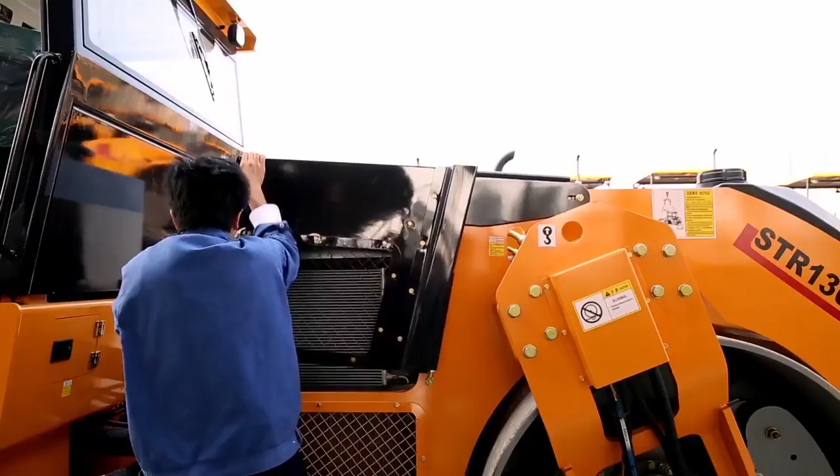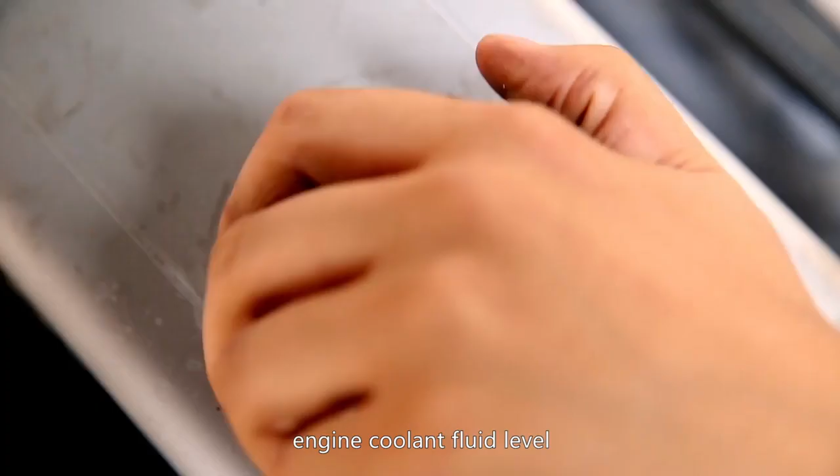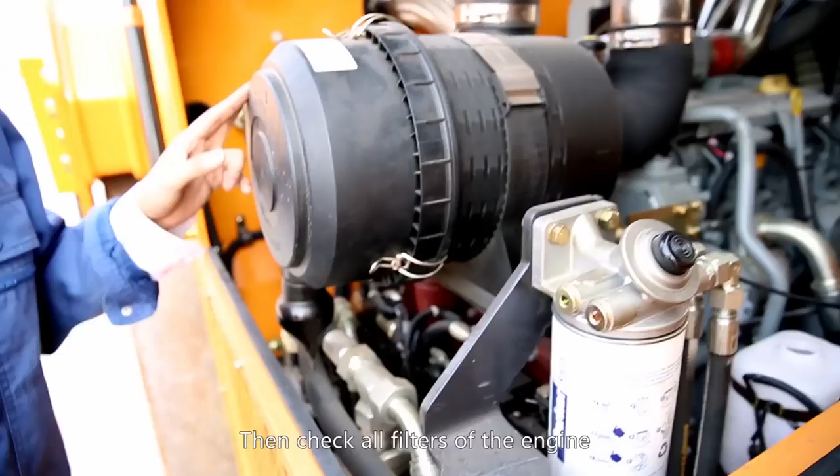Getting started. Before starting the machine, conduct a check of the machine. First, check the engine oil level, engine coolant fluid level, hydraulic oil level. Then check the diesel level. Then check all filters of the engine: air filter, oil filter, and diesel fuel filter.

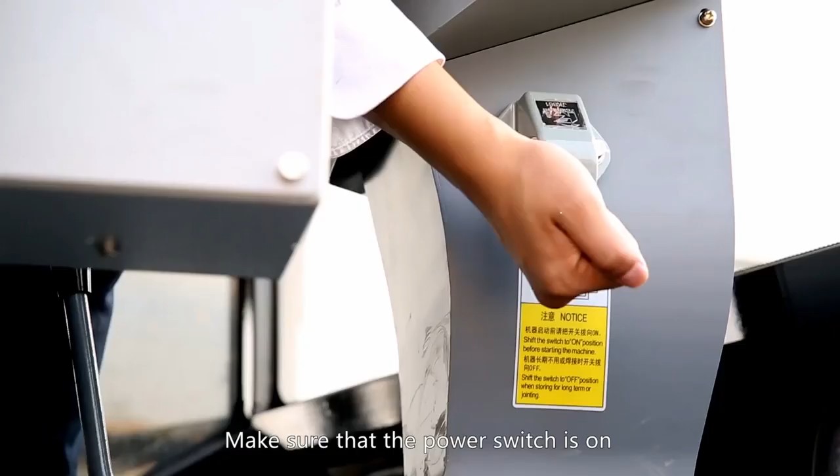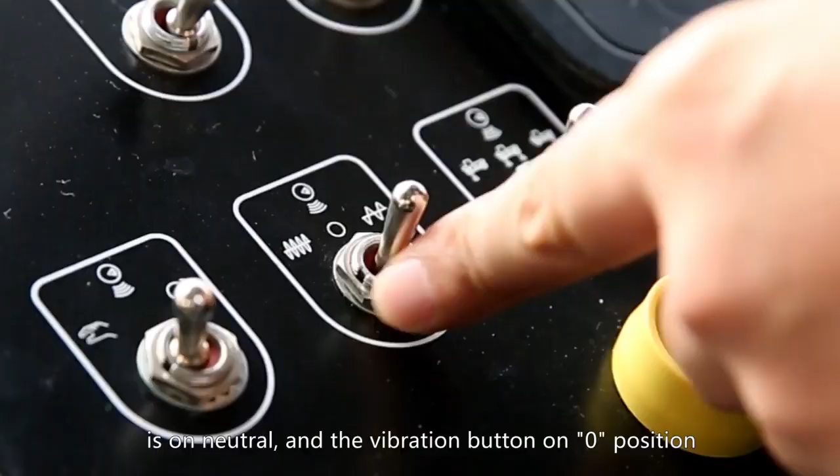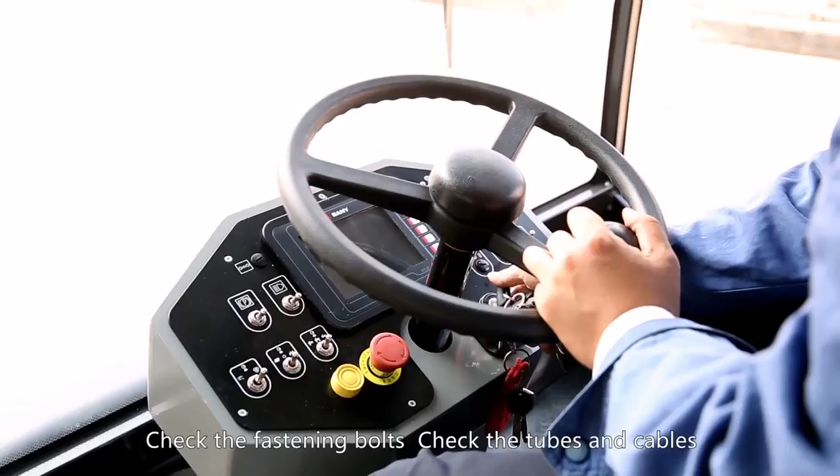Make sure that the power switch is on, the accelerator lever is on neutral, and the vibration button is on 0 position. Insert the key to the ignition lock and turn it to the 1 position. Sound the horn 3 times to warn those near the machine. Check the fastening bolt, check the tubes and cables. Make sure that everything is normal, and then start the engine.

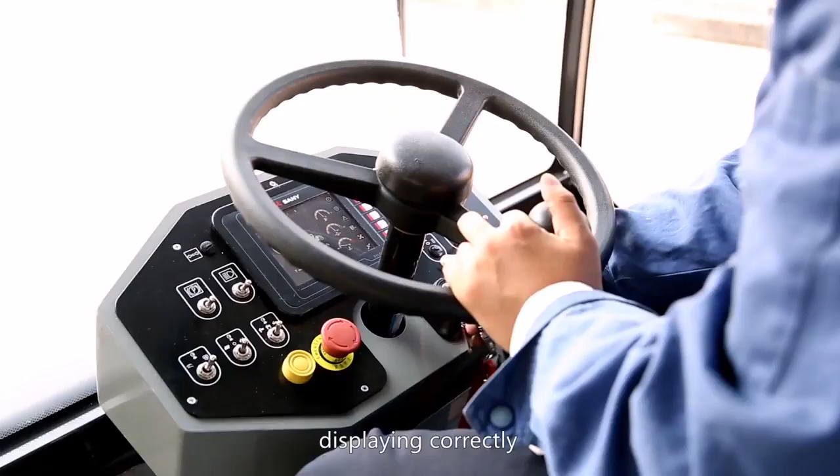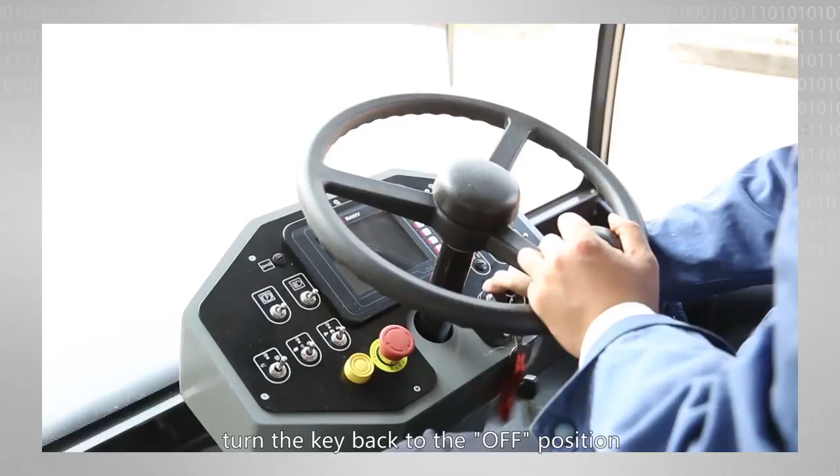Check to see whether or not all indicators and instruments are displaying correctly. Turn the ignition key to the START position and release it immediately when the engine has been started. Attention! 1. To avoid damaging the starter, each turning of the starter motor must not last longer than 10 seconds. When the engine cannot be started, turn the key back to the off position and wait for 30 seconds before trying again. 2. Avoid high-speed rotation when the motor temperature is low.

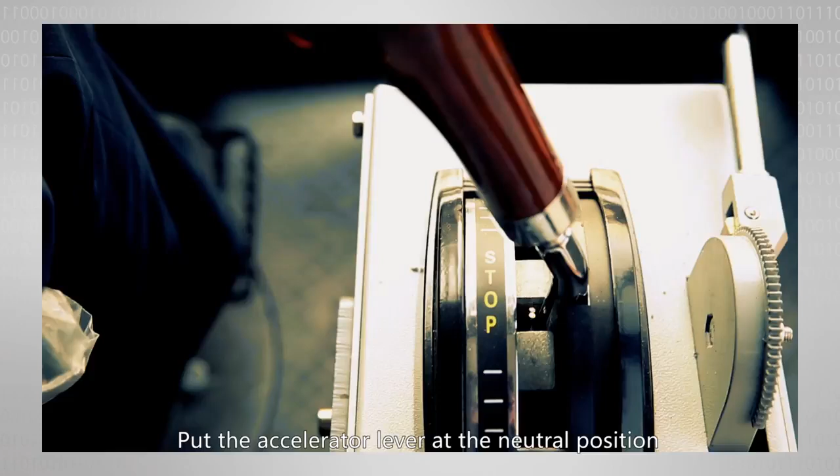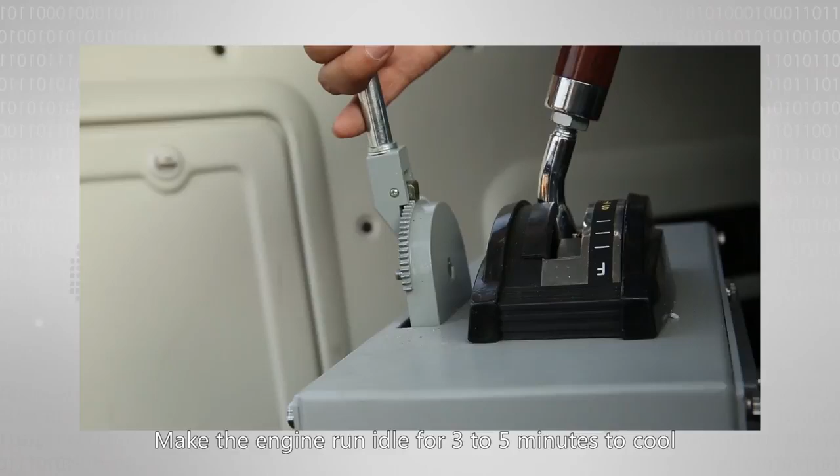3. Put the accelerator lever at the neutral position before starting the engine. Otherwise, the engine will not be started. 4. Make the engine run idle for 3 to 5 minutes to cool off before turning it off.

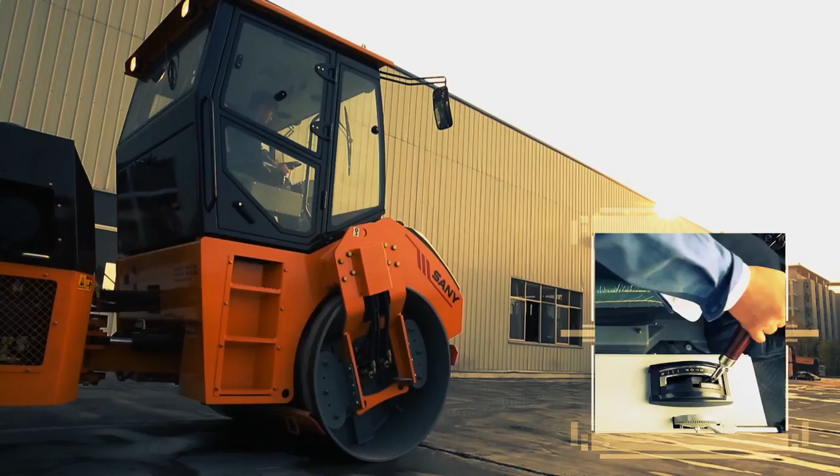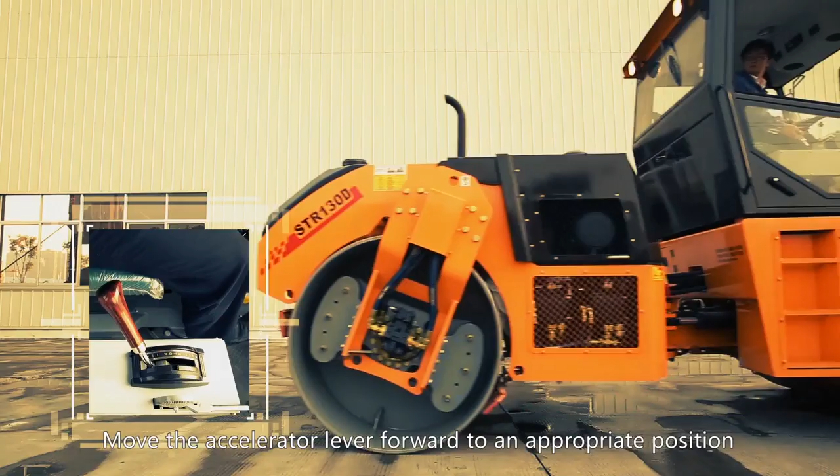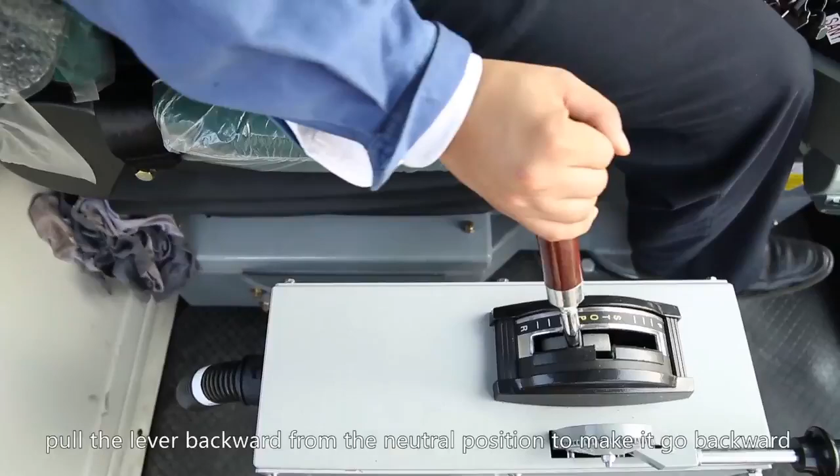Running operation. Pull the throttle lever slowly to raise the engine speed to a rated speed. Select the gear of the appropriate traveling speed. Move the accelerator lever forward to an appropriate position. Push the lever forward from the neutral position to make the machine move forward. Pull the lever backward from the neutral position to make it go backward. To stop, place the lever in the neutral position.

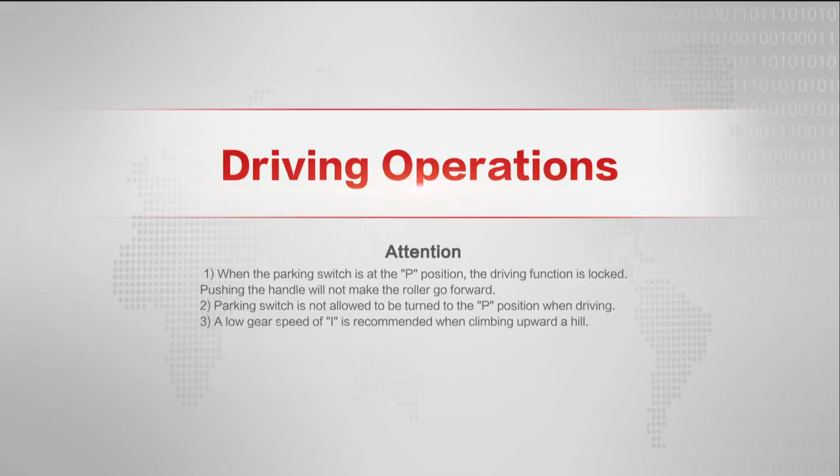Attention! 1. When the parking switch is at the P position, the driving function is locked. Pushing the handle will not make the roller go forward. 2. Parking switch is not allowed to be turned to the P position when driving. 3. A lower gear speed of 1 is recommended when climbing up a hill.

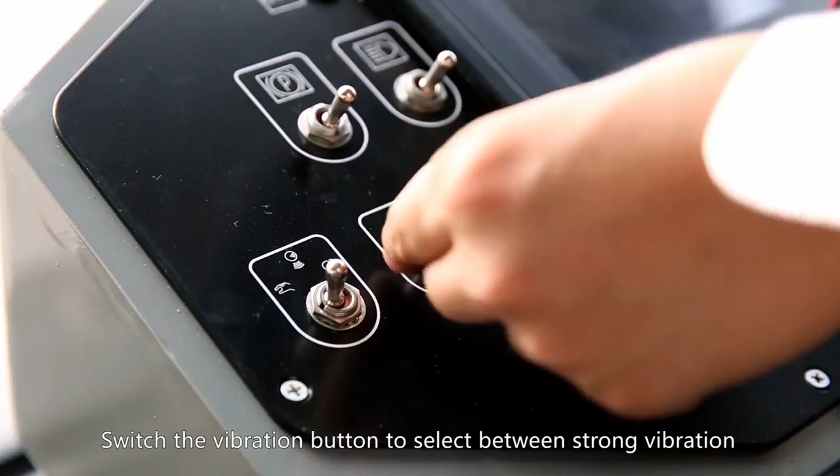Vibration operation. Switch the vibration button to select between strong vibration and weak vibration and make the machine travel at Gear 1 or Gear 2. When the manual vibration mode is selected, press the button on the accelerator lever to start vibration. When vibration needs to stop, press the button on the accelerator lever again.

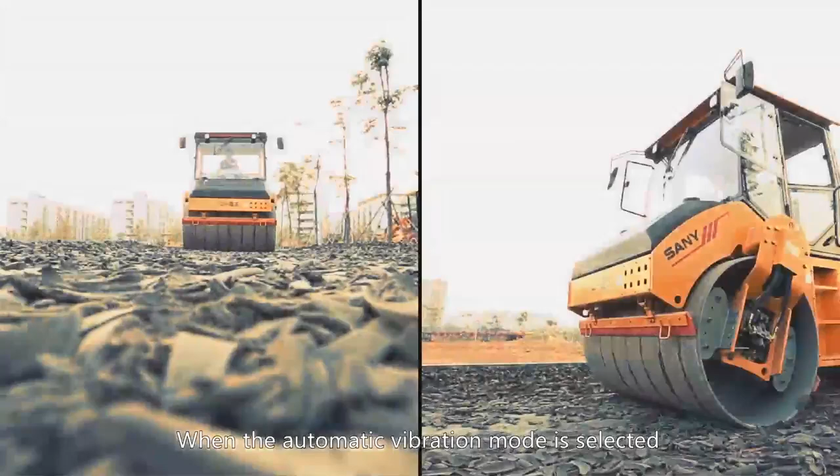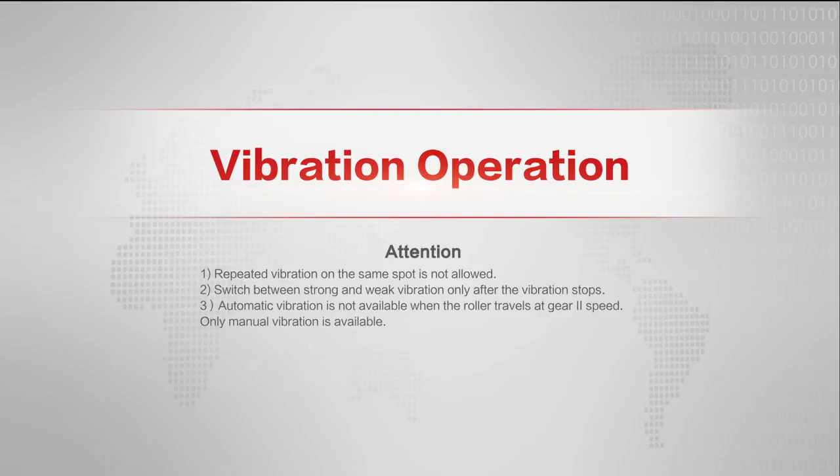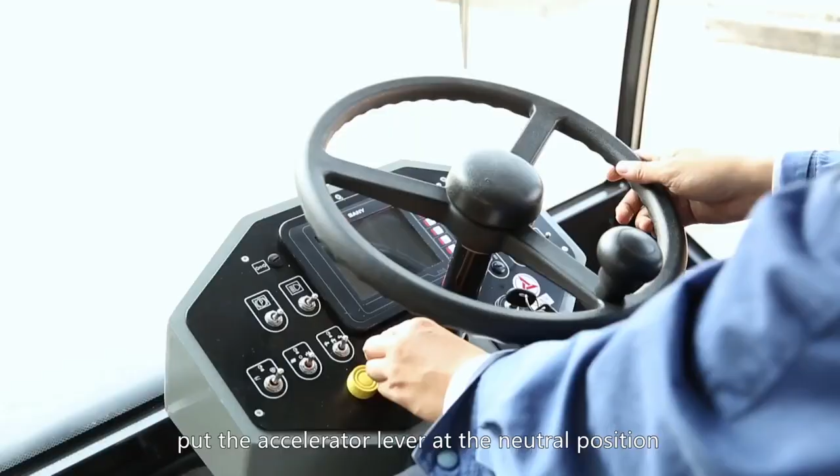Stopping, parking, and emergency stopping. Stop driving. Place lever in the neutral position to stop the roller. Parking. To stop and park the vehicle, put the accelerator lever at the neutral position. Turn the parking switch to the P position or stall the engine.

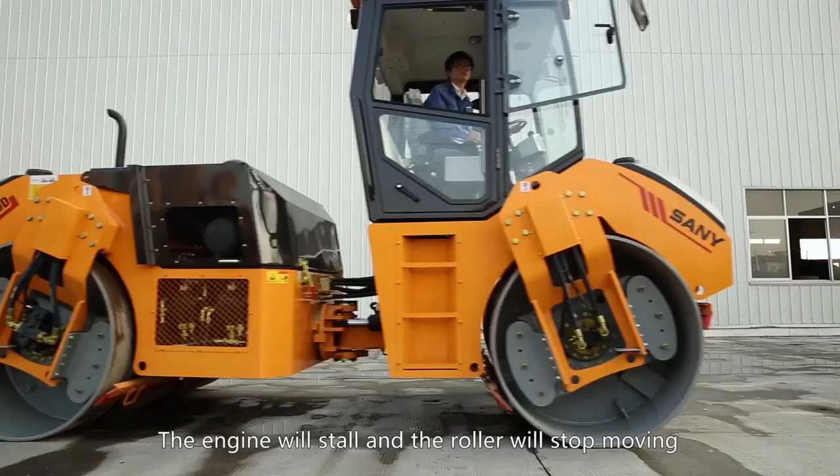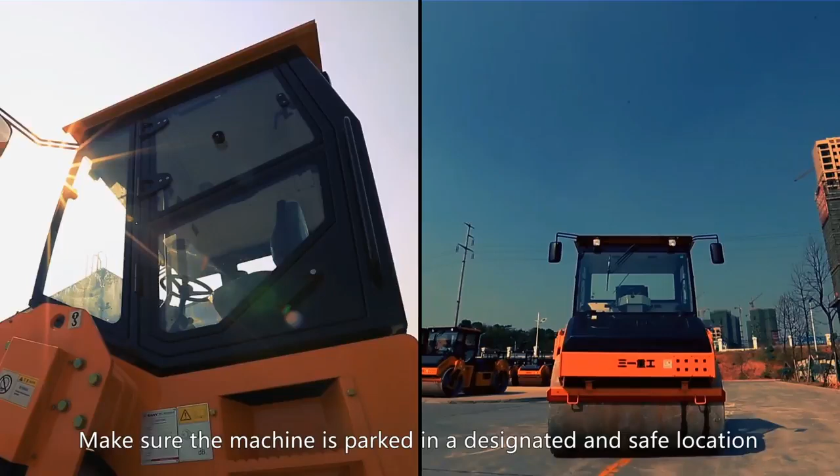Correct shutdown. Make sure the machine is parked in a designated and safe location. Before turning off the engine, let it run idle for 3 to 5 minutes, for it to cool down gradually. Then turn off the power switch and lock the cab door.

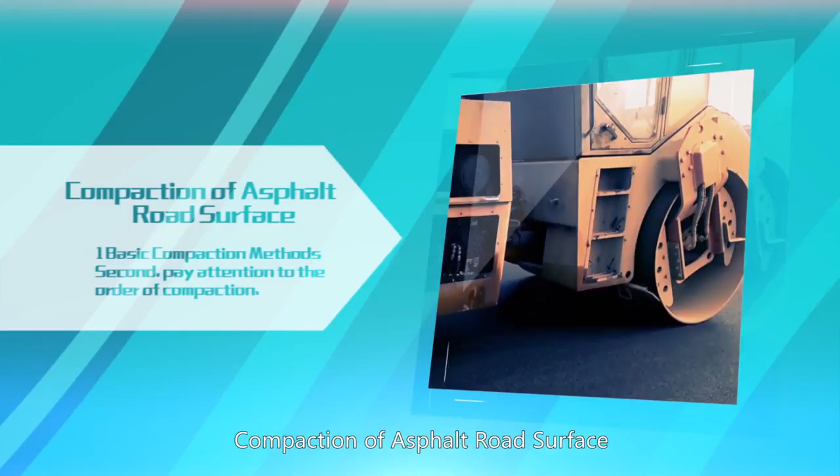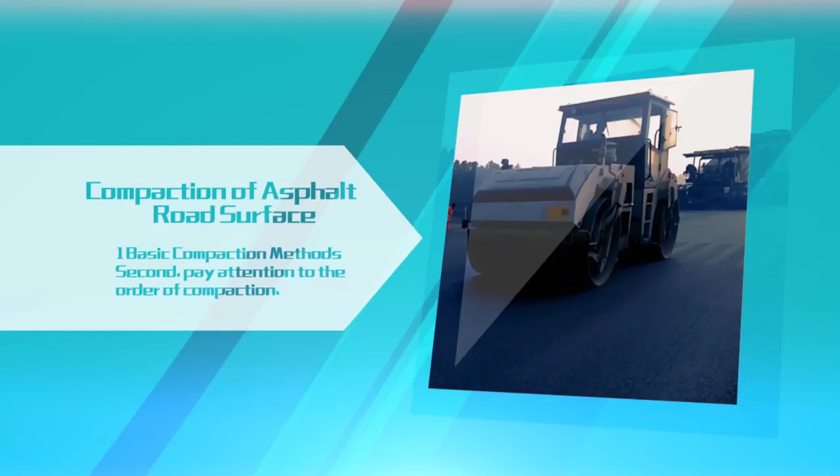Compaction of asphalt road surface. 1. Basic compaction method. First, following the asphalt paver closely and compacting slowly. When the paver is paving asphalt, the roller should follow it closely and do the compaction timely.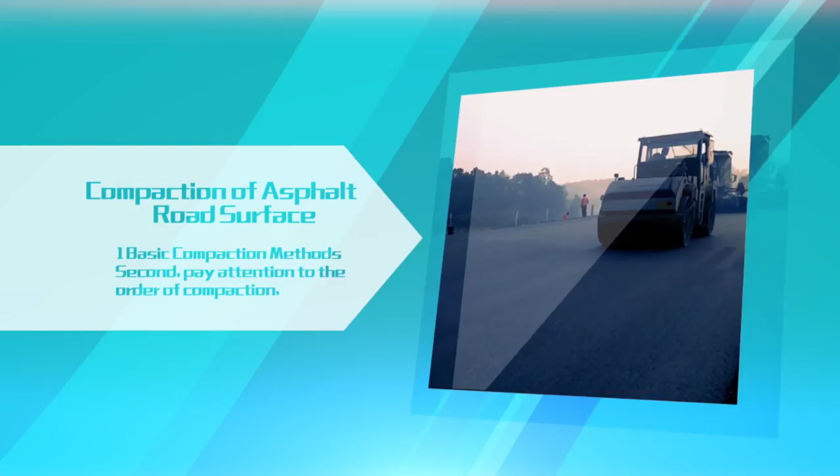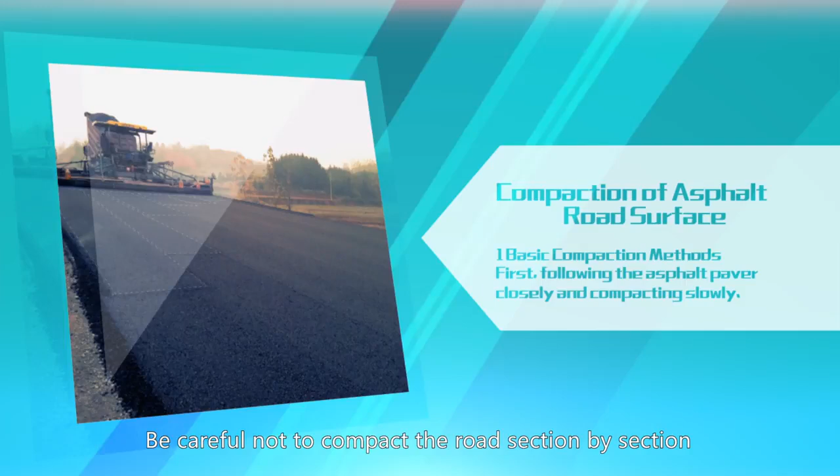When the entire road is compacted, the roller should continue to follow the paver in the second round of paving in order to make the second layer of paving compacted timely. Be careful not to compact the road section by section. It will cause height differences this way. Pay attention to the order of compaction.

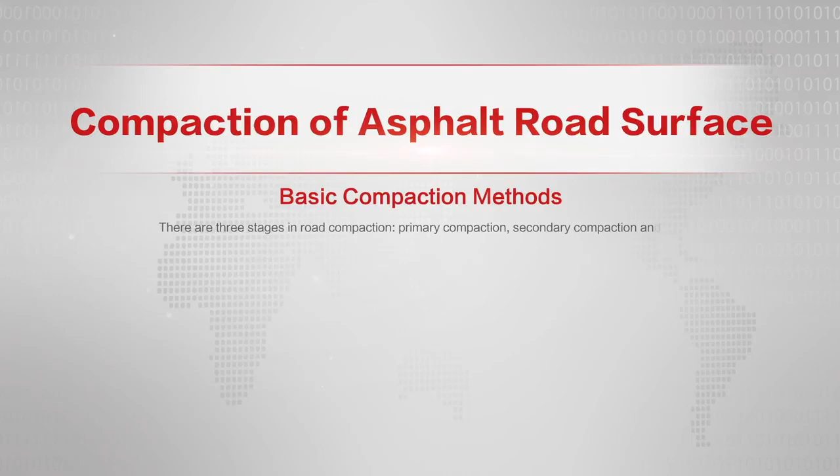There are 3 stages in road compaction: primary compaction, secondary compaction, and final compaction. The times of compaction differ from stage to stage. See the following table. Tandem rollers are used for the initial compaction and final compaction. Pneumatic tire rollers are used for secondary compaction.

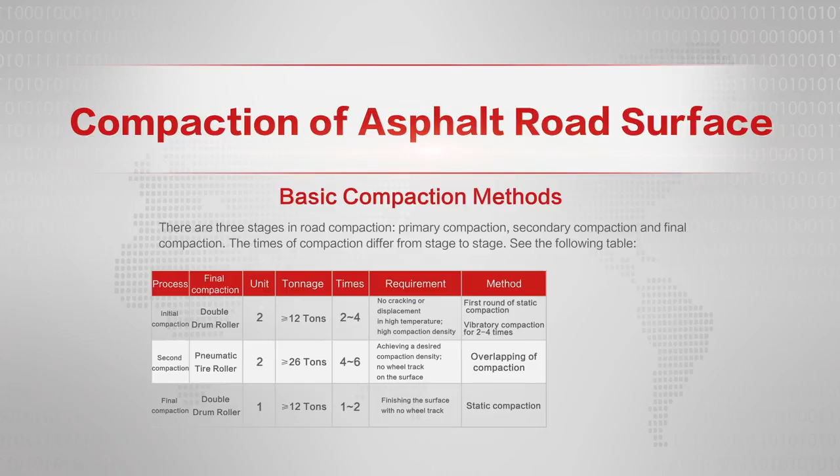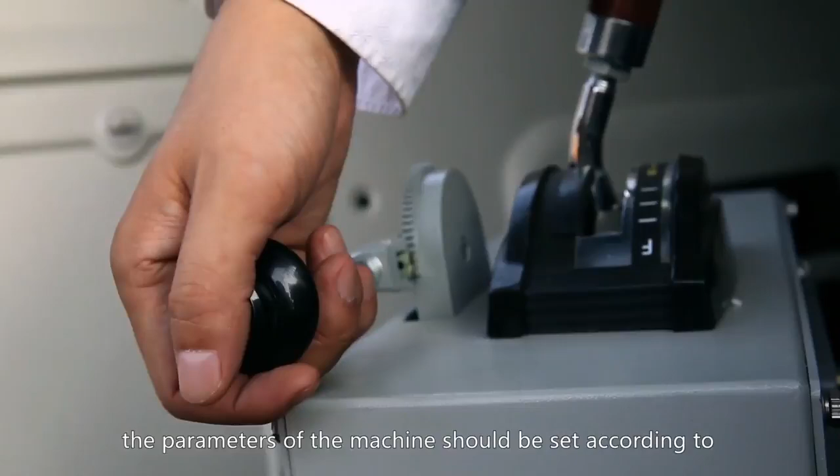The purpose of the final compaction is to improve the evenness of the surface and remove the impression of the pneumatic tire roller. 2. Principles for setting the basic parameters during compaction. During compaction, the parameters of the machine should be set according to the changes in the compacted objects.

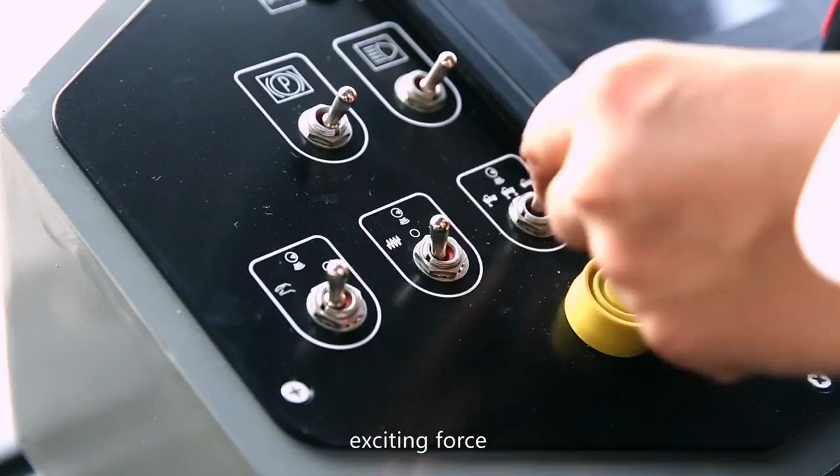Parameters of the machine to be set: frequency of vibration, exciting force, vibration or static compaction, traveling speed, and the amount of water sprinkled. Factors influencing the parameter setting: thickness of compaction and temperature, grading, and types of the materials for compaction.

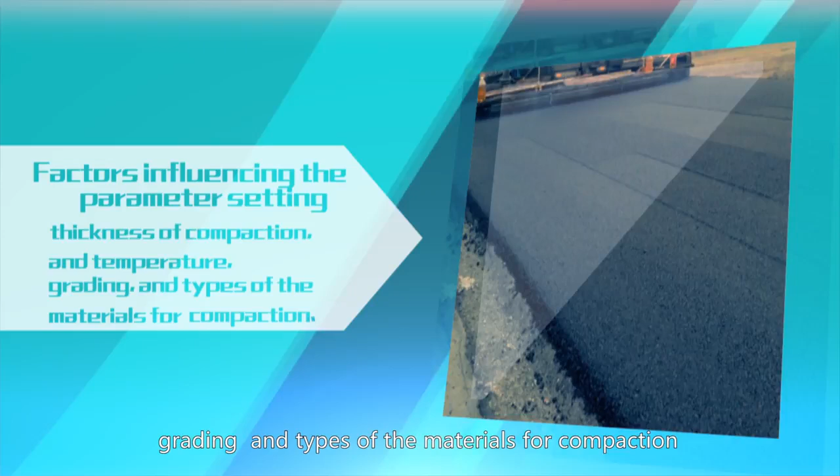Principles to be followed: when compacting the middle and lower layers of the road, greater exciting force and better compactness are needed because of the thick overlay and coarse grain composition. Requirement for evenness is low, so the low frequency and high amplitude mode should be selected. The traveling speed is about 3 to 5 kilometers per hour.

When the upper layer is compacted, because the paved layer is thin and the grain grade is fine, less exciting force, higher evenness, and the high frequency and low amplitude mode are required. The traveling speed is around 3 kilometers per hour.

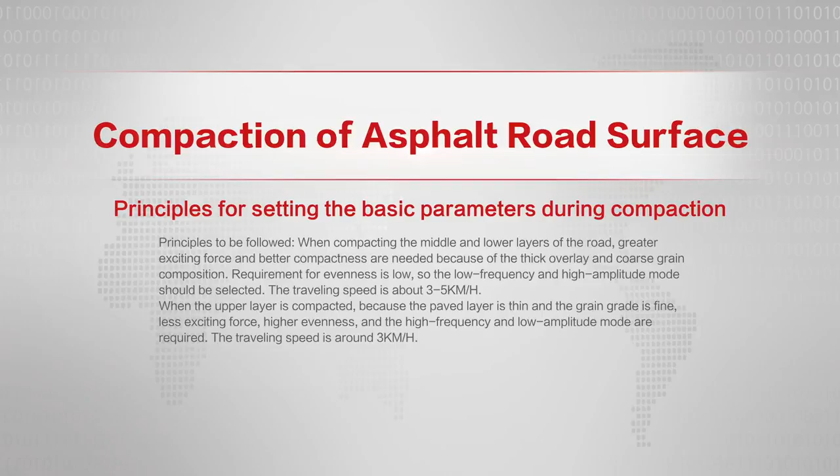The amount of water sprinkled should be based on the principle that minimal asphalt is stuck to the drum. In this way, temperature of asphalt will drop more slowly. This is beneficial to the compaction work.

This is caused by low temperature in the process of compaction. Compaction of asphalt mixture must be completed at a temperature above 70 degrees Celsius. When the temperature drops below 60 degrees Celsius, it will be difficult for the asphalt to move, and the aggregates will be crushed by the exciting force, leading to washboard effect.

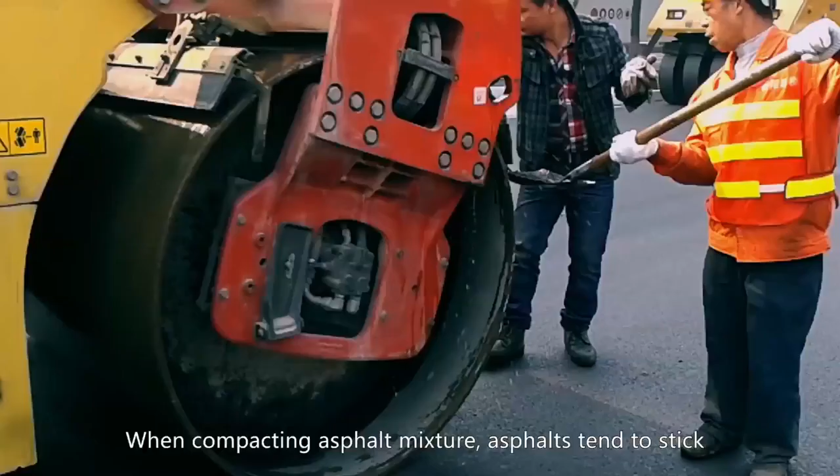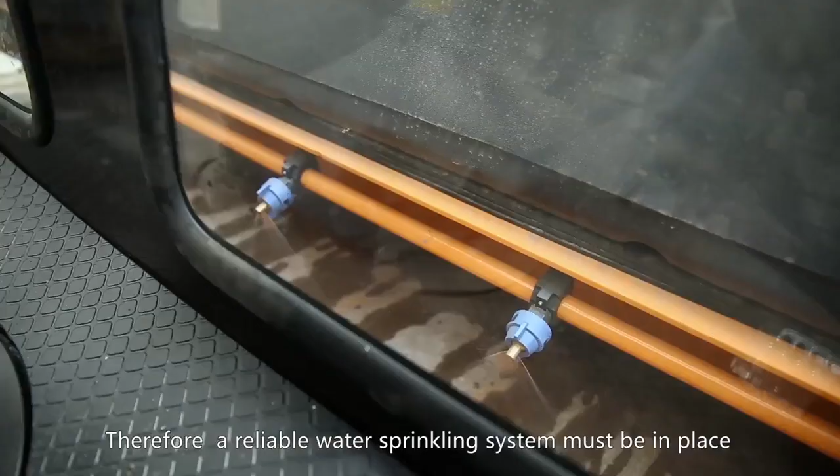Asphalt sticking to the drums. When compacting asphalt mixture, asphalts tend to stick to the drums, affecting the quality of road construction. A water film is formed on the drums by sprinkling water to avoid this. Therefore, a reliable water sprinkling system must be in place in the process of compaction.

The amount of water sprinkled must be just right. Too little sprinkled water will result in asphalt sticking to the drums, while too much water will cause the asphalt temperature to drop too fast and cause washboards.

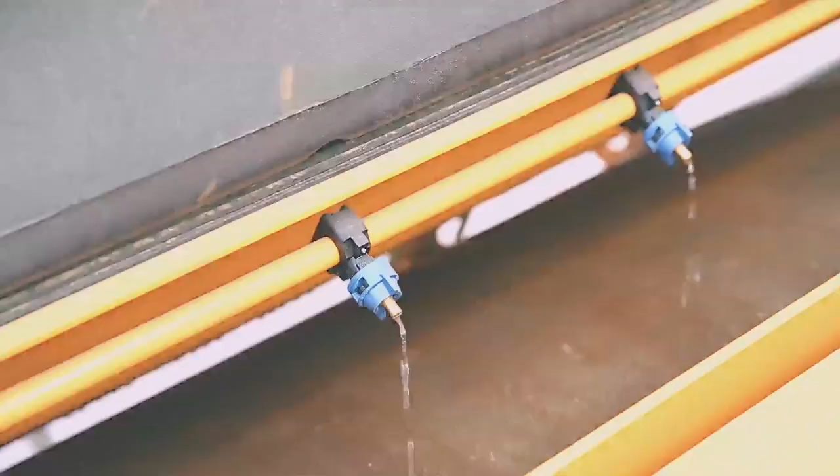The general public hope the road can be used longer and the road surface denser and smoother. Your work is important for realizing all these. Work hard to practice the operating skills. Work safety is your first priority. The public and you yourself will be proud of your excellent work.